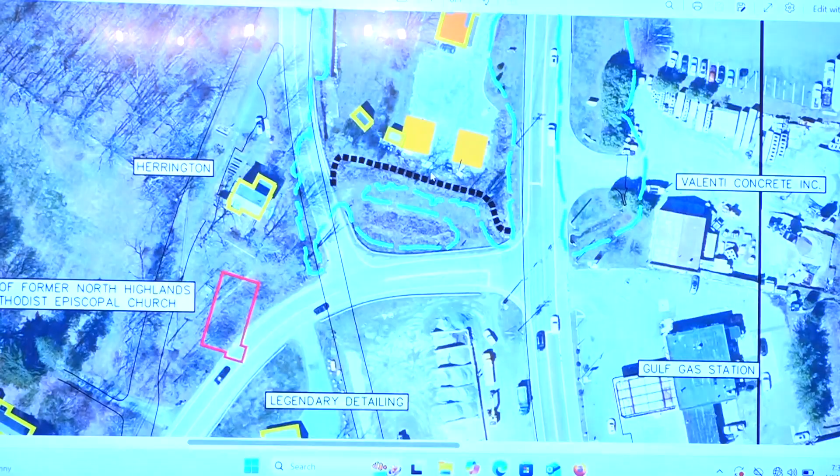So he wants to construct these two garages over the existing gravel parking lot, so there's going to be no additional impervious surface. You can see where all this is gravel parking - the new buildings are going to sit in that parking lot.

There's a shed here - I believe it used to be the pool, back when it was just a house. That's going to be gone. So we're getting rid of that, and whatever impervious surface is around the back closest to this swale here - the turquoise lines, that's the 100-year floodplain.

When I was looking at the survey last night, it looks like there's a water course right behind the garages, marked 15 feet away. That doesn't have any flow - I wouldn't call it a water course. It's a ditch with stagnant water. There's no flow.

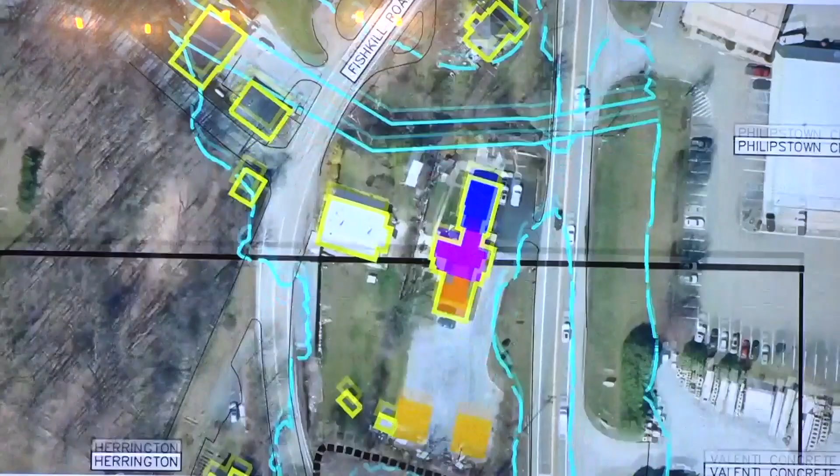This is not the outlet for this - this swale captured water when this was a road that went through here, Old Highland, Old Albany Post Road. It captured water coming from this direction here. This is the old 2003 swale here. So it came from this way and then goes under Valenti here. So it's two separate water courses.

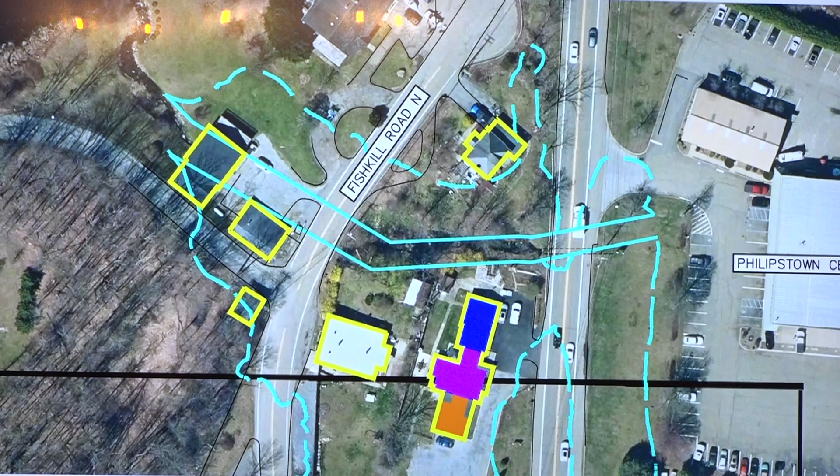The outlet is - here's these straight lines here, that's the floodway, and then this is the floodplain. So it's basically stormwater runoff. Well, from the pond, it's a little bit more than that. Unfortunately, it's been channelized and buried in spots. But whatever.

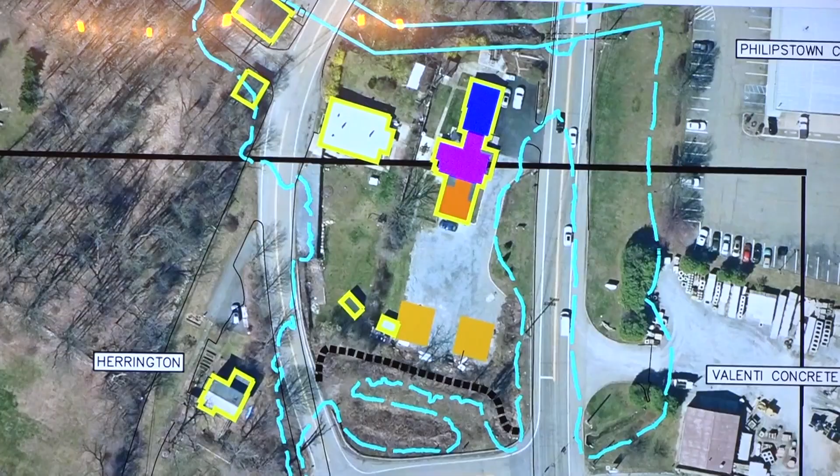I think we need to do a site visit, just to look at it, and I think we can give a very short memo to the planning board prior to their meeting that we'd like to do a site visit to determine, is this a drainage ditch? Is it - which it probably is. Is it anything of significance? Possibly not. And then we can figure out from there where to go.

I know this area was highlighted in our Putnam County Emergency Management Plan as an area we'd be looking into for funding in problem storm events. So we should also look back at that and see if that can lead to the design standards you propose. Because I think that area in some of the larger hurricanes had ponded pretty significantly and affected those properties. And it was identified on our emergency management plan.

So now I'm kind of getting my bearings on what that vegetated wetland is there - it's more of a retention pond off the road. Yeah, well, it is all in the floodplain. So you have this little piece here, that's the access road. Here's the retention pond, and there's an access road that goes like this that they use to clear this out.

The county comes through, because this is a county road. The county comes through and they clear all this out, and that's the road that they use. Maybe we can add that information in. It might actually benefit you to move things up a little further, depending on what they're saying, if they're amenable to that - just even based off of that.

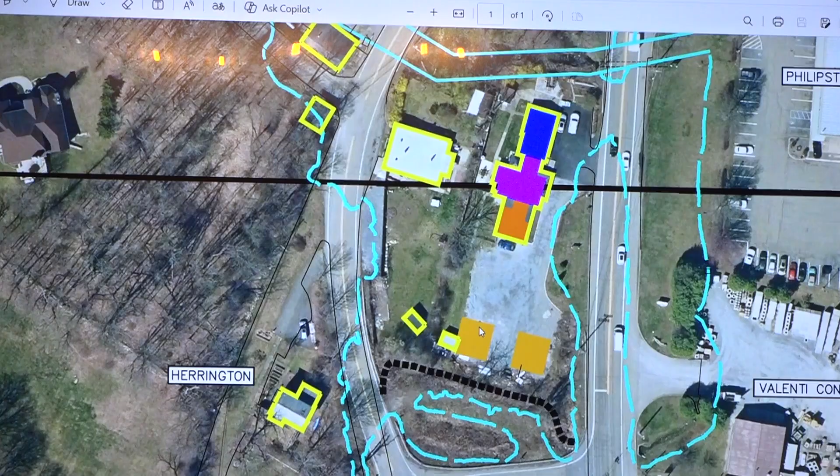The only reason why we have it pushed back is to get the most, to be able to maneuver around here. But you said large trucks are not going in. Right, he would just be - he has box trucks, he just has a panel truck, right, he just has one. He does have a bunch there now, but that's because he bought the business that he bought had a bunch of them, and he's selling them. So there is a bunch of equipment there that he's not going to use, just full disclosure.

So, as I said, I think we need to do a site visit. I think it would be nice to find out from the planning board, are they going to do a site visit or not? And if they are, we should just coordinate it and do it together.

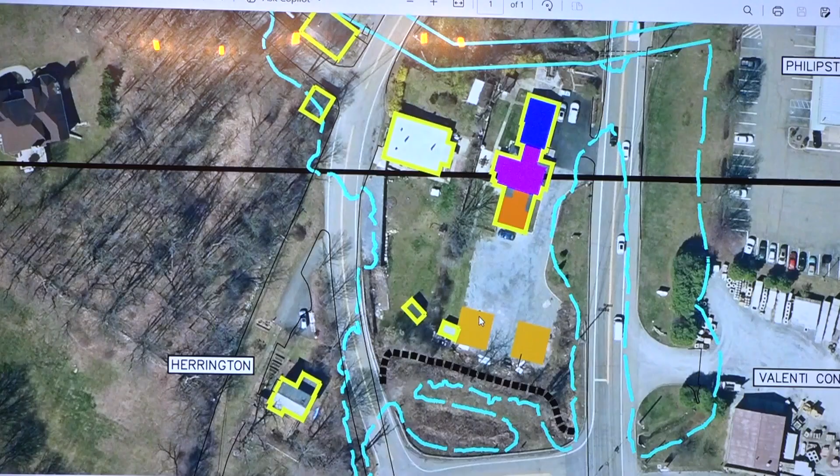So the buildings are gonna be a concrete slab on grade? I believe it's just going to be on timber, right on the ground. Yeah, I was assuming they were going to be small pole barns. Yeah, there's no slab, there's no foundation, from what I understand. They're just going to sit on 6x6 beams, timbers.

Anybody else have questions or comments? Not right now. Okay, okay.

So I guess, does anybody have any questions regarding the site walk, first of all, or anything to add from that? Essentially, Bob, you were the only one that wasn't there, though I think you've been at the site previously.

The homeowners would like to build a garage that is probably about 20 feet from the stream itself. The only other options would be not to build a garage in front of the house, which I assume they don't want to do, though somebody did that down the road from you, and it's actually pretty cool. But anyway, wherever the garage would be, it would be within a wetland buffer.

So previously, with the previous homeowner, we looked at the site, and there was supposed to be a remediation plan for some damage they had done with tree cutting, shrub removal, and so on. Some of it was done. I'm not sure it was done that well.

So the banks of the stream are degraded. And my thought, but I want to hear everybody else's opinion, is that I personally would have no problem with them siting the garage, give or take where it is, in return for stabilizing the stream, both structurally as well as with plantings.

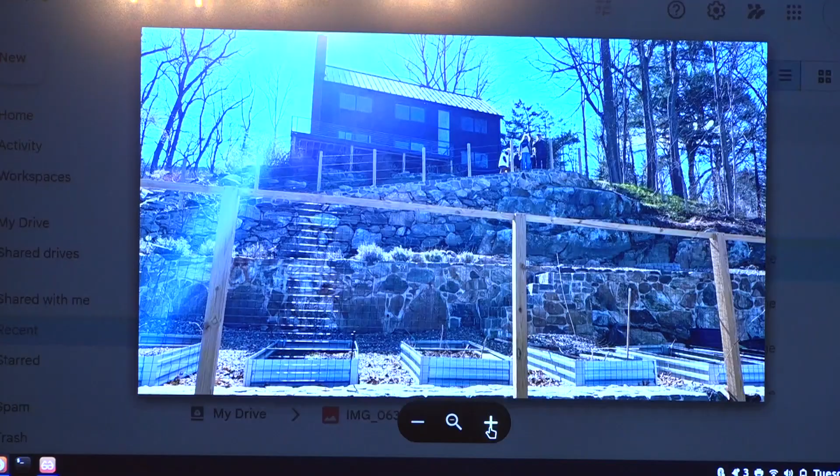So I think there are actually three questions that I have. One is stormwater prevention, pollution prevention during construction. Two, are the retaining walls as they exist now engineered well enough to hold a pool. And three, the biggest, is what type of pool - I'm not talking about the size - is it chlorine, is it salt water, is it a natural pool? If it's the first two particularly, but even the third, if there is an overflow event, we need to protect the intermittent stream.

Where, in relation to this photo, would the pool be? On the top of the hill? It would be basically where the second wall is - what you're looking at, a few plants, so it would be there.

All the retaining walls would have to be redone. And do you see that as being masonry, or do you see that as being poured concrete and then maybe faced with something? Poured concrete faced with something.

So thus the question becomes, what do we do about overflow or failure? I think failure is the less likely scenario, but overflow from big storms is the concern.

So here's a little portion that's, do we have it here? Yeah. So here's a portion here that we could do something. That's probably in the 10% range.

What's the size of the pool? Do we have a size on it? Probably like 12 by 30. 12 by 30, in depth. We're showing it to scale here.

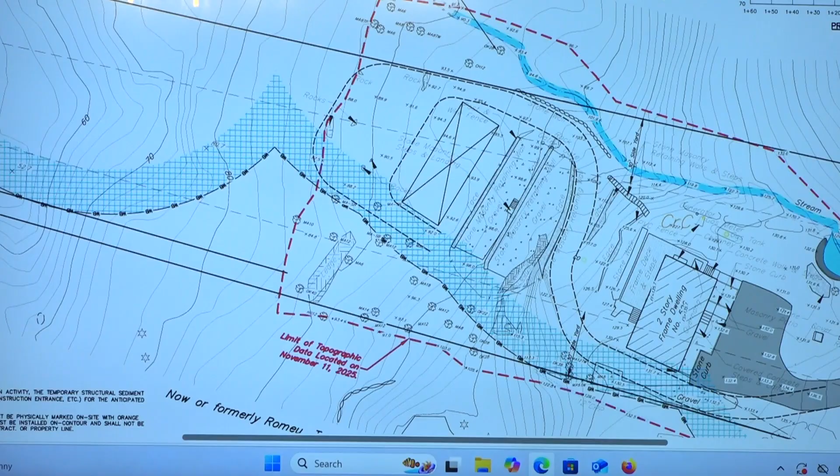How deep is it? 5 feet. The pools we're building and proposing here use a cartridge filter, so it doesn't require backwash. We use ozone and ultraviolet lights for sanitation, so it doesn't need chlorine or salt, so that's a help.

But I still think we would want to contemplate some type of retention. What did we do for the one pool off of Lane Gate? I think they put a curtain drain that just drained out. We also did that one on Luzmira Lane, yeah that's the one. We did infiltration, I think we did Cultec. Did they ever do that? I don't even know. Yeah, oh they did, okay, we did Cultec on that. So that would work here.

I really don't want to harp too much on the stream restoration portion either. I think there is mitigation potential here, but it's not extreme. It's really going to be about stabilizing the property and the banks to handle a big storm so the garage doesn't eventually erode, and adding native plants to help sheet flow. Doing that properly would also keep the septic field out of danger if there was a major event like in 2011, though I'm not sure what would come down that.

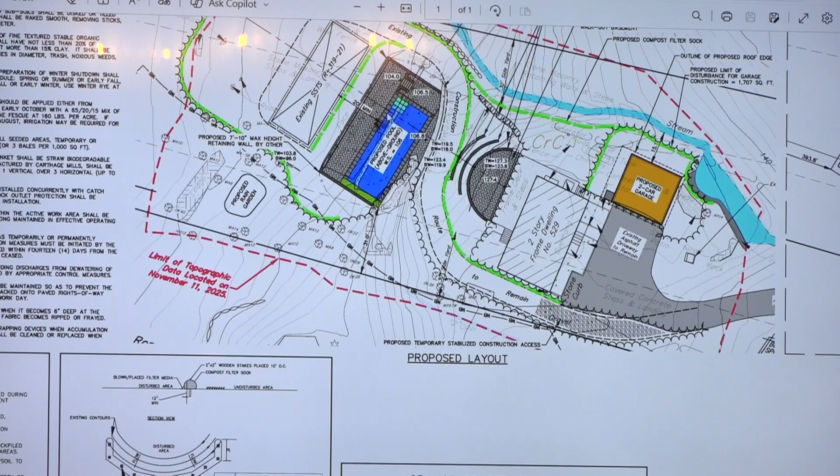Any other questions or comments? I'm interested where in this drawing the original retaining wall is located. Is the edge of the pool sitting on it, and you build out from there? Well, the lower wall is here, and we're matching that, so that's built up. Then the middle wall is shown here, you can see it through there. There's the middle wall. So here's the lower one, the middle one, and the upper one is here.

So you're building everything up to create a patio around the pool? Yeah, I have a section through here, a section through the site. Maybe I can make it bigger, but here's the upper retaining wall, and here's the middle retaining wall right in here. You can see where the existing grade drops. The middle wall is here, and we're just matching the lower wall, but not as high.

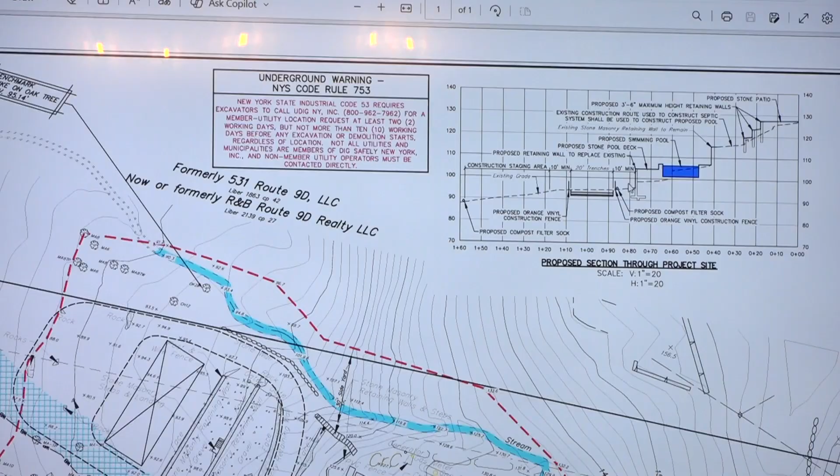And then we have the septic system in here. So you would be rebuilding all 3 walls? I think, yeah, we'd have to. Okay, well that's what I thought. The middle wall would just go away, there would be no more middle wall. You would just have a lower wall and an upper wall. The upper wall could probably be masonry, since that's all just sheer ledge rock, I don't think it would be too difficult to deal with. Then this lower wall would be holding up the pool and the patio.

So basically you'd have one, the upper wall would just be ledge. Right, but we're gonna... And I'm assuming the pool is constructed, not prefab? No, it'll be constructed in place, because there's no way to get something down there.

So, do you feel another meeting is warranted, or would you want to work conditionally and approve a conditional permit? We can work together to put together a restoration plan for that small section behind the garage. I'm comfortable with doing a conditional permit for the garage. I don't know how everybody else feels. Yeah, I'm okay with that.

Okay, the pool, I think we need a little bit more detail. We can condition it with the Cultec added, and you'd have to send that plan back to us. The question is, I almost think there should be two permits, because they're going to be doing them at two completely different times, not at the same time, right?

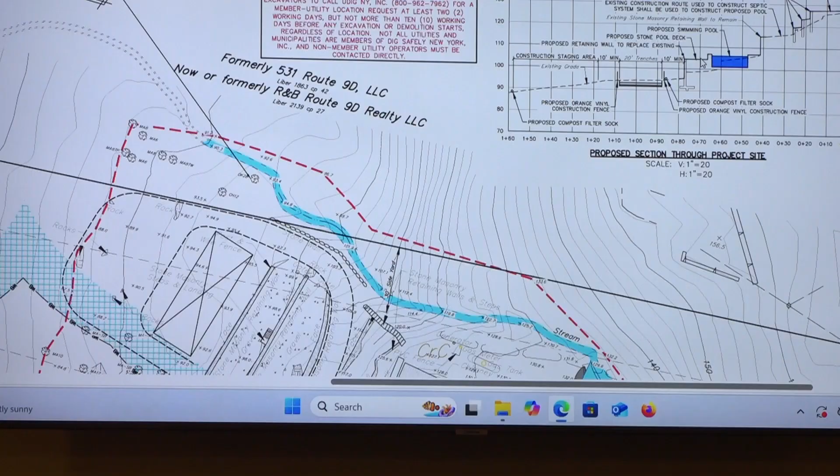Yeah, I think they should be two permits, so if one gets hung up for some reason—which I don't see, but they are really very different. So the conditional would be the garage and the restoration, the planting, and the stream stabilization. Is everybody comfortable with that?

How does that work? When does the applicant have to show their remediation of the banks of that stream—is that before or after? Well, we'd issue a conditional permit with the condition that they'd have to provide that plan. Okay, and then I'll review it, and I can circulate it to Andy.

You guys can take a look at it, and if there are deficiencies, we ask for changes, and if it looks good, we can let them go with it. They don't need to come back to another meeting to address those. I think that's a great idea, I think that makes sense.

Okay, thank you. With that said, do I have a motion to issue a conditional permit for the garage, which includes restoration of the stream? I'll make a motion to issue a conditional permit for the garage and the stream remediation. Do I have a second? Second. All in favor? Aye.

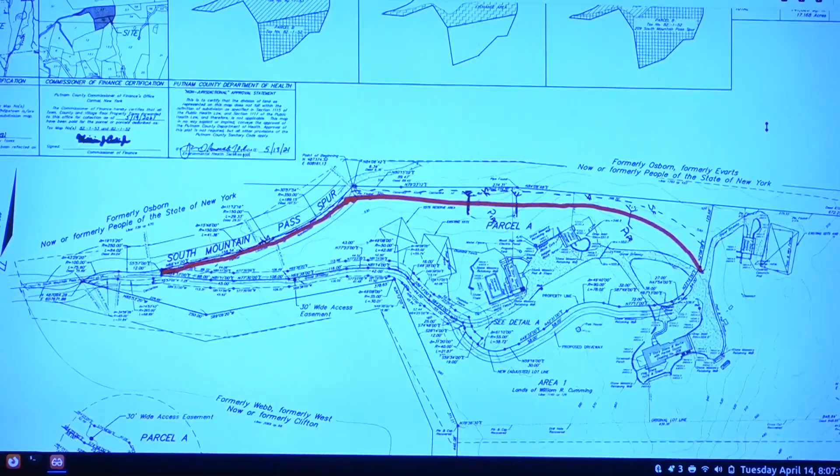They have a large parcel of land off of South Mountain Pass Spur. The property has been divided, and what they'd like to do, rather than drive by the front house constantly, the red line is an overgrown road, if you will. Road might be a big word at that point, but it is a road they've been using. Near the back it gets pretty much impassable at this point, but they'd like to upgrade it and make it a proper road they could use, following the contours that are there. We need a couple crossover pipes, indicated by the black lines.

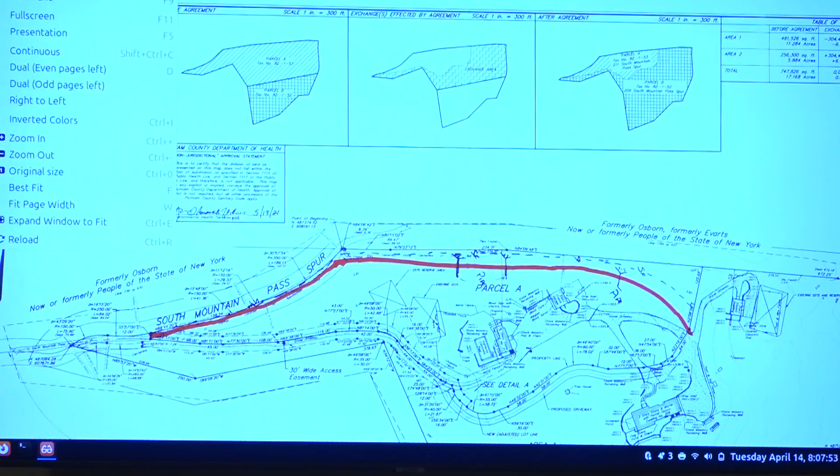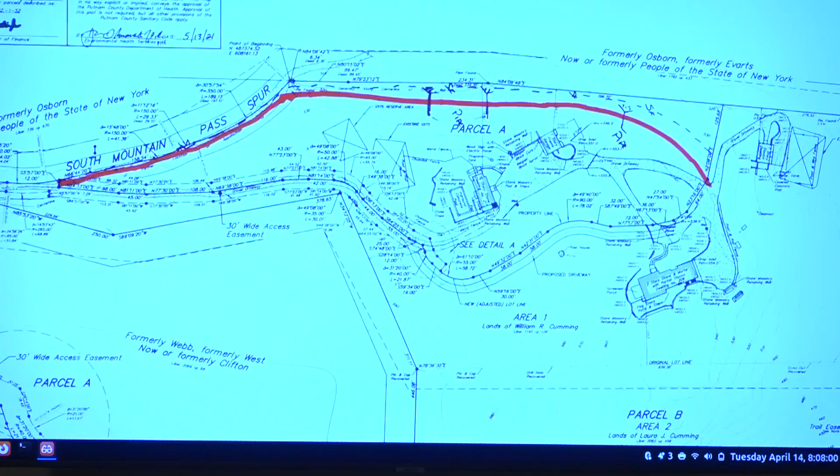I went to the building department to see if there's any permitting, and there was none required on the building department's part, but we did meet the land disturbance threshold since the road is approximately 800 feet. We would rough the road in approximately 16 feet wide, ultimately finishing around 13 or 14 feet with some shoulders. There will be some land sloping—we're trying to do as much cut and fill as we can with what's there, cleaning up especially on the backside. There's some earth to be moved that we're just going to pull down into the valley to make it a proper drive.

Max and I did a site visit, and 90% of the road is there. There's one area where the slope needs to be lessened, and then there's one big rock which needs to be hammered apart. It's for sale if you want it—probably pretty good money there, yeah, if you can move it.

So what kind of road is it? You said the road is there. Is it like gravel or? I'd call it a woods road. Yeah, it's a very good and drivable woods road, even without four-wheel drive if it wasn't wet.

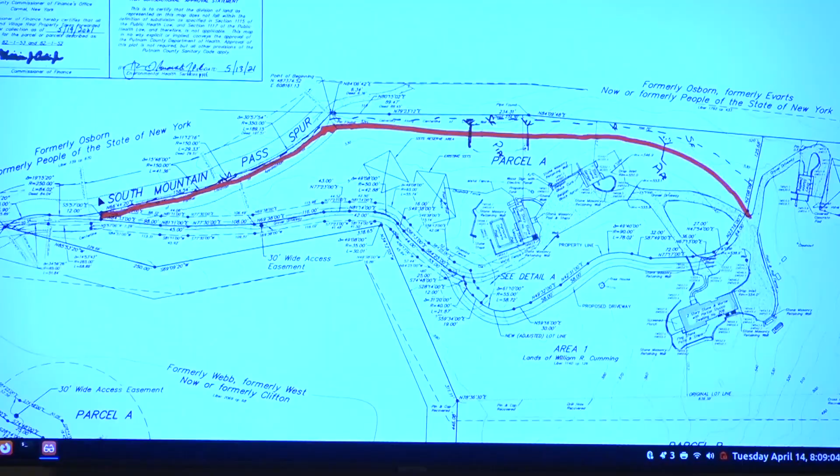Except for the rock that's two-thirds of the way up. So I guess they built it from one side and came from the other. So there's no wetland issues with this permit. It's solely the fact that this type of work doesn't need any other board oversight. But since the level of ground disturbance is at a certain threshold, we would be the board that would review it, or your board would review it.

So there's no overlap? I thought there was some. No. Like Andy said, I went out to the site twice, once with Andy, once I just met Peter there. After looking at the plans that Nick provided, they're far enough away. There's a small intermittent water course, well over 100 feet down in a valley away from there. And Andy, you concurred, right, when you were out there? Yeah.

So does this come under a minor permit? I think it would be a standard permit just based on the amount of ground disturbance, and that's why we wanted to have this presentation done, so we could make sure we were following the process correctly, but I don't see it as a major impact at all.

So if we were to issue a permit, I think it would be a conditional permit, because what we still need to know is exactly where the drainage culverts are gonna be, and what form of temporary SWPPP you're doing in terms of erosion control.

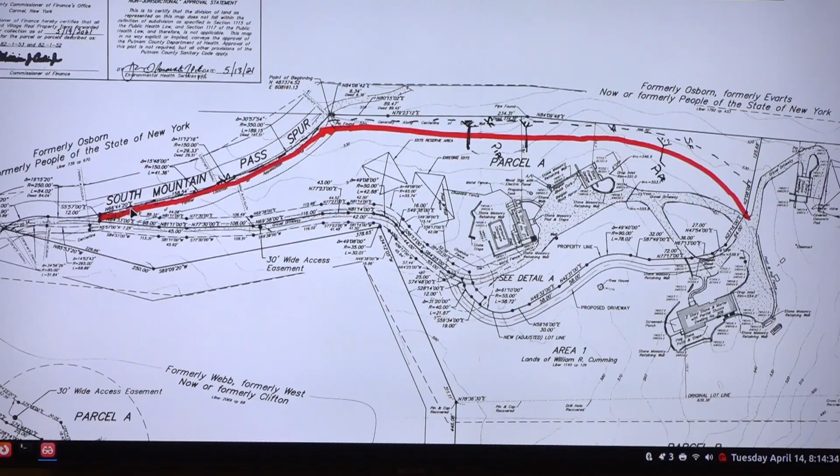Okay, at least I have two other short items. I did a site visit to Manitoga, which this should be a minor permit.

Ultimately, they want to dredge the pond, but prior to dredging, the New York DEC is gonna require them to do three 2-meter borings within the pond to see what material is in there, whether it could be left on site or whether it is considered hazardous and needs to be removed.

So that should be done as a minor permit unless anybody else has any other thoughts on it. The dredging project itself, I think, is quite a ways in the future because it's gonna be an expensive project because of where that pond is situated. If anybody's seen it, it's part of a quarry.

There's no wonderful access. Is this by the house? It's right by the house. That's where they want to dredge the pond? Yeah, because it's been filled in from storms tremendously, and ideally they'd like to get it back to a depth of about 2 meters, about 6 feet.

If they went that far, it's a lot of material. It could be as much as 3,000 cubic yards. I mean, it's a lot. But the first step, the way they would do the borings is they'd either use a small platform or a john boat.